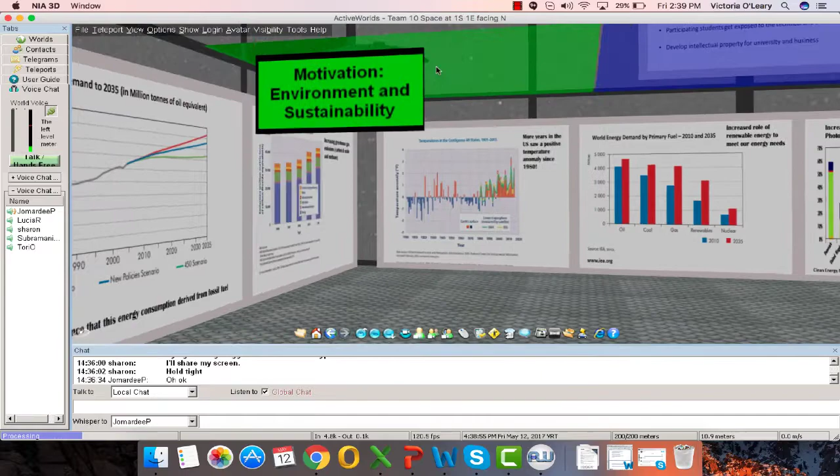Awesome. And so to get a little intro overview, our OPSPARC technology spinoff is basically based on the electronic speckle pattern interferometer that was used to test the non-optical surface of the James Webb Telescope, technically the backplane of the telescope. We're using this technology to find deformations in the hydrogen fuel cells before certain hazards come into play, like hydrogen embrittlement, leakage, and possible corrosion.

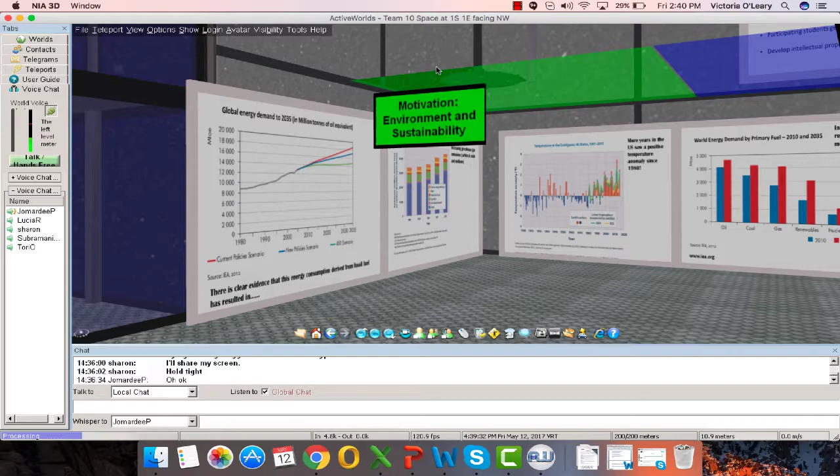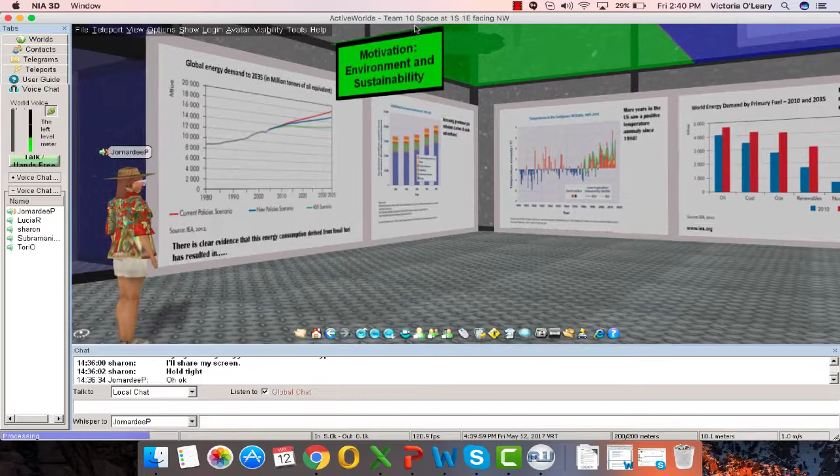And if you move to the left, follow the signs that say this way, we're looking at the motivation, environment, and sustainability. These graphs demonstrate global warming and climate change. The third graph talks about the annual average temperature in 48 states and high demand for energy.

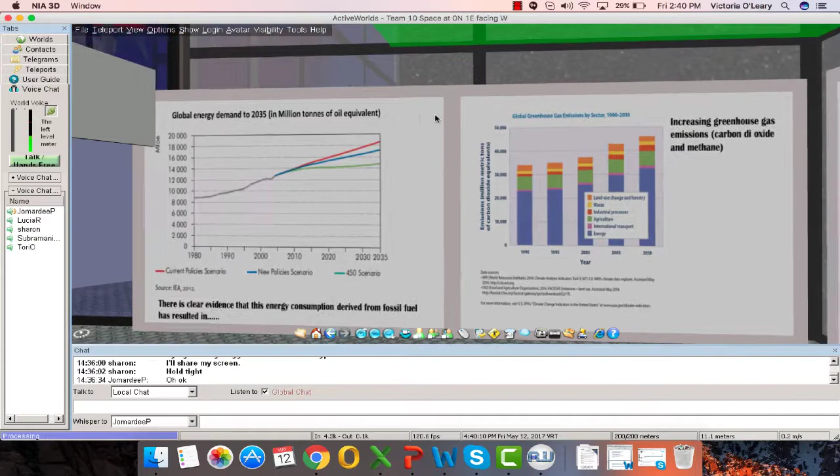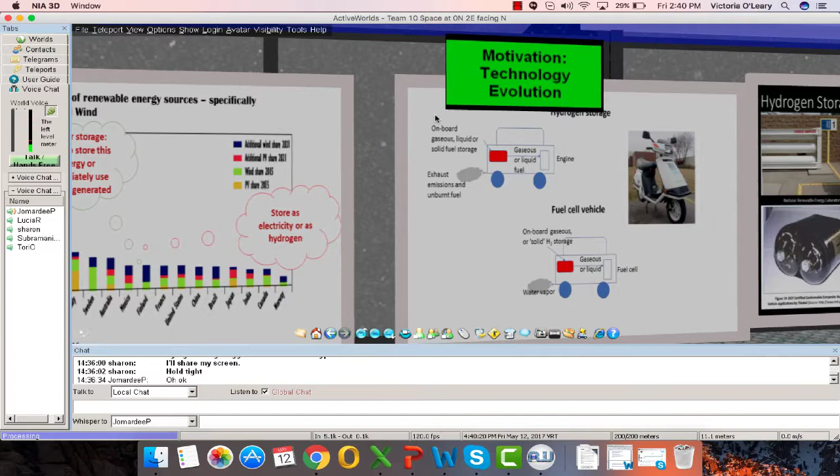If we continue to the right, going to motivation, technology, evolution, I'm going to hand it off to Matt to talk more about that. Hello, everybody. So yeah, I'll talk a little bit about hydrogen and hydrogen storage. So we focused on the automotive industry as a case study for hydrogen storage and fuel cells. But again, this type of speckle interferometry can be used for basically any storage tank, for example, methane or oxygen.

So we wanted to look into hydrogen specifically due to the challenge of hydrogen embrittlement for certain tanks like high-strength steels, titanium alloys, and aluminum alloys. But there's also opportunities for improvement in automobile applications for storing enough hydrogen to achieve greater than 300-mile range within the constraints of weight, volume, durability, efficiency, and cost. And cost is sort of the impediment right now.

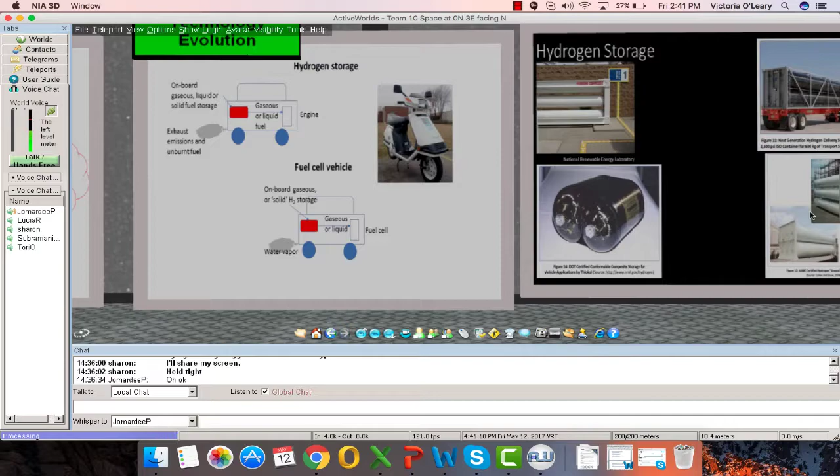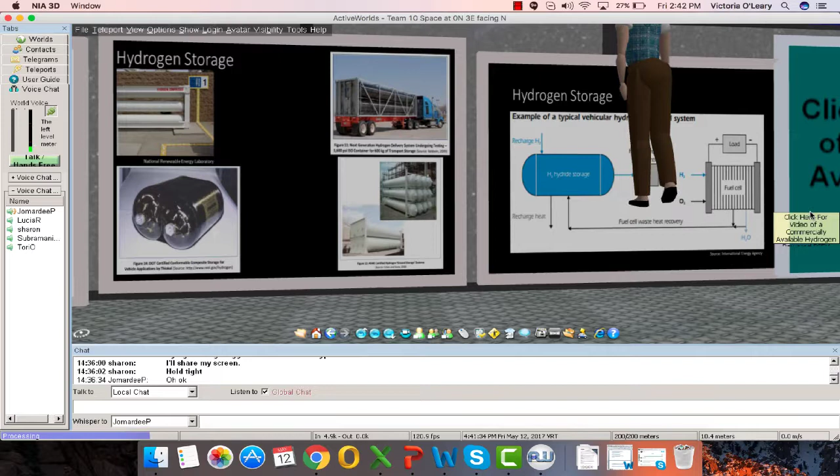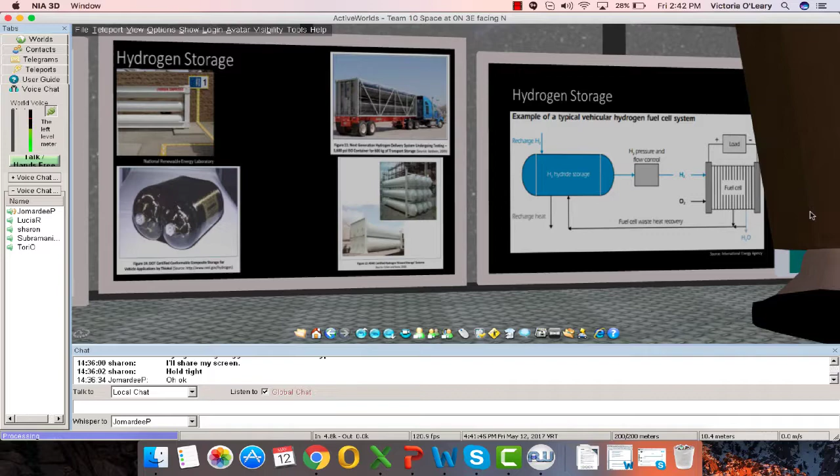So current tanks in this regime are compressed hydrogen carbon fiber composites, and typically you'll see 350 and 700 bar. Again, costs right now are too high, so that's a big worry. We also have a worry with leaks. As you guys know, hydrogen is extremely small. It can leak through tiny pores in welded seams. So one idea for this might be hydrogen detection tape, or the IntelliPigment tape. This is just a side idea, but it has a proven track record with space shuttle launches.

And hydrogen is a colorless, odorless gas and highly combustible. So it's critically important that we have measures in place to ensure safety. Hydrogen burns in air at a wide range of concentrations from 4 to 75% by volume, and it's also hard to see these flames. We think speckle interferometry could be a viable test technique to detect early signs of material defects in storage tanks that lead to critical failures. This would help facilitate proper standards for hydrogen storage and ensure safety and public acceptance in the broader consumer market for hydrogen fuel cell vehicles.

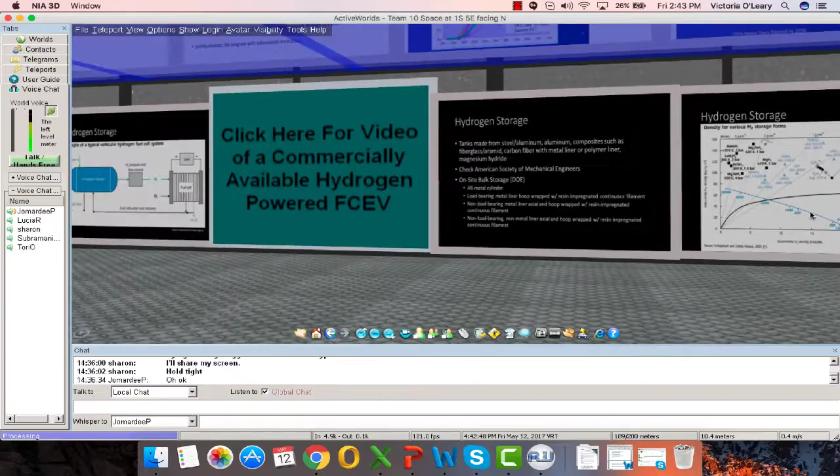Currently, we have only 3 vehicles on the market, one from Toyota, one from Hyundai, one from Honda. And the majority of the market share for hydrogen refueling is in California, with 20 out of the 23 refueling stations being there. And also some information about the U.S. hydrogen supply: 95% comes from the natural gas reformation process.

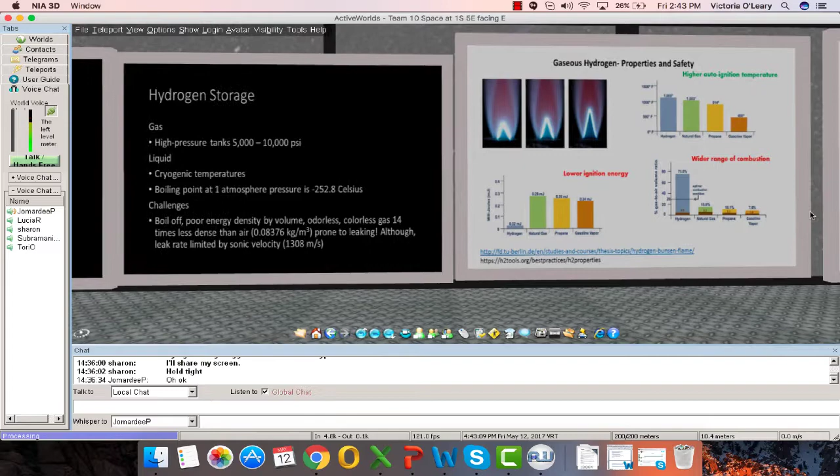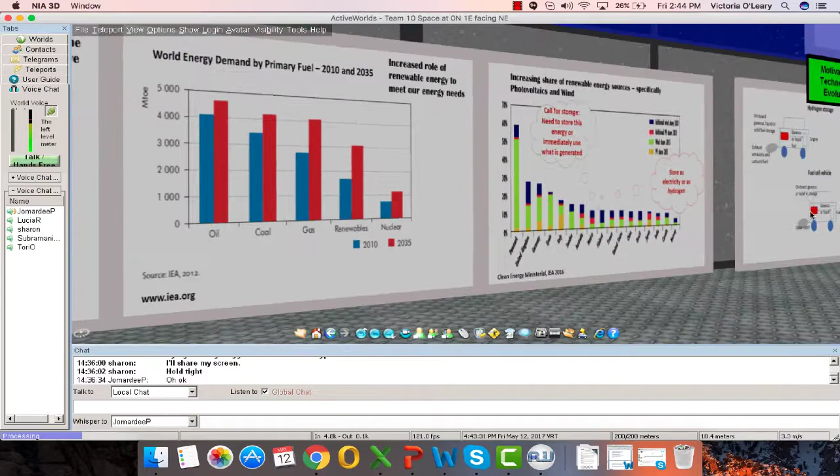So the major concern as far as hydrogen storage goes is the manufacturing process from different automotive companies and the ease of access to those tanks, so that we can run the interferometry tests on them in as automated a way as possible to reduce cost. So yeah, with that, I will turn it over to Alan. We will be moving to the right here. Just follow the signs: existing non-destructive testing technologies, ultrasonic detection.

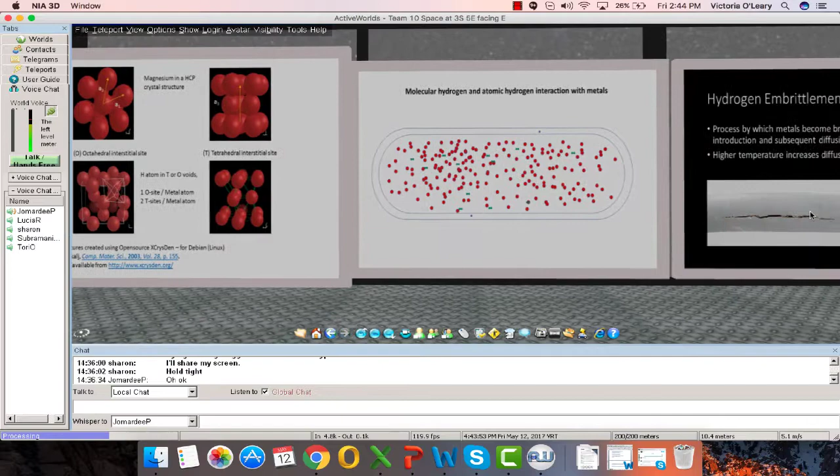Go ahead, Alan. Okay, so a small overview of non-destructive testing, or NDT. Those are methods that allow us to test a specific sample without altering it in such a way that it's rendered not useful anymore. One of the ones that we looked at was ultrasonic testing. Ultrasonic testing is basically using high-frequency sound waves to inspect the features of an object.

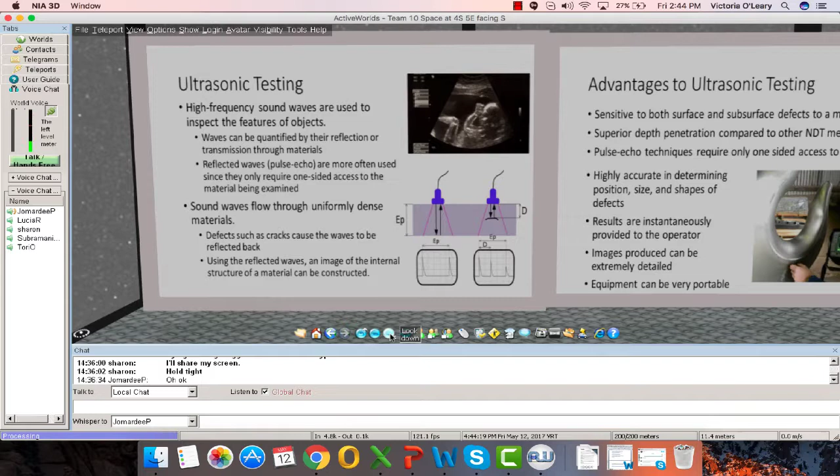You're sending sound waves into this object, and they'll come back to you either as reflections or transmissions if they make it all the way through the material. And by using these waves that either are reflected back to you or transmitted straight through the material, you can construct an image of the inner workings of the material.

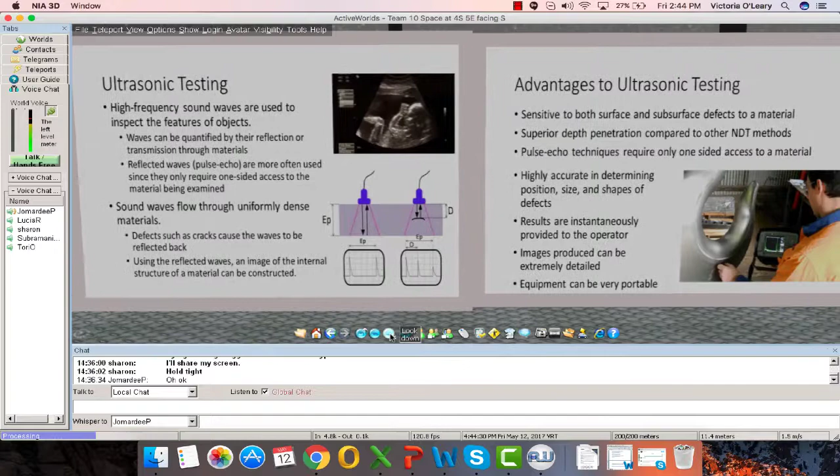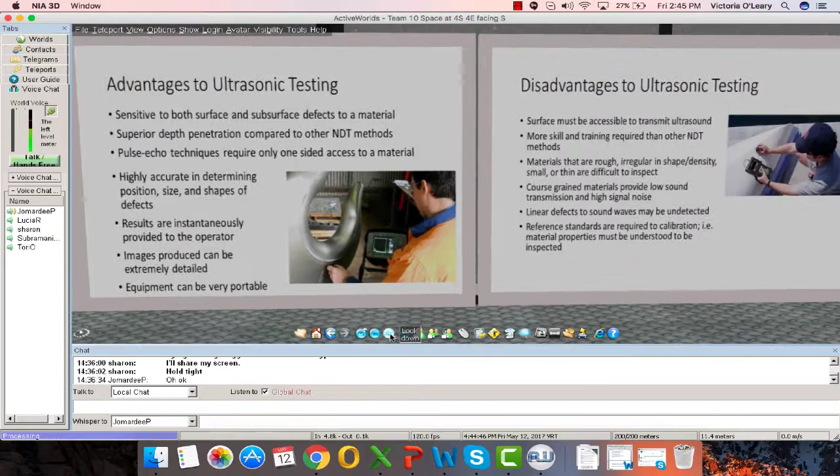Sound waves will normally flow through uniformly dense materials, but when they encounter something like a defect, like a crack, they'll bounce back. And using some computational analysis, you can quantify these reflected waves to construct an image, kind of like what you're using with the ultrasound for pregnancy tests.

So some of the advantages of ultrasonic testing is that it's sensitive to both surface and subsurface defects, depending on the frequency of sound that you're using to penetrate the material. It's got superior depth penetration compared to other NDT methods, and the pulse echo method in particular requires you to only access one side of the material. You don't need all-around access.

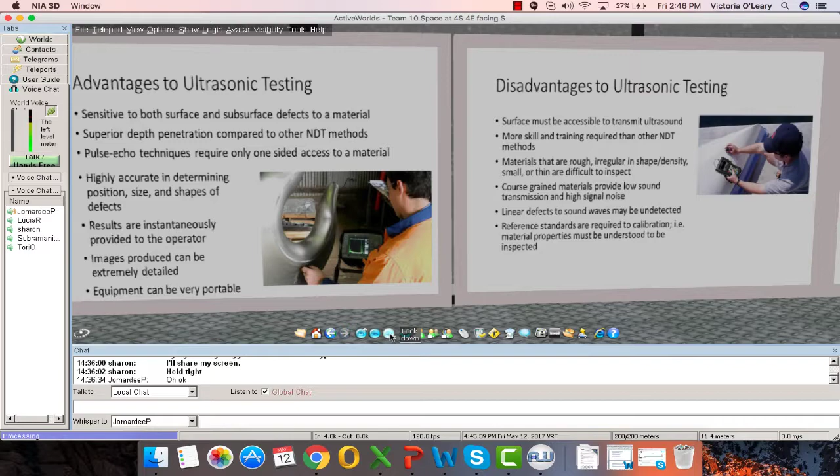Ultrasonic testing is highly accurate in determining the position, size, and shapes of specific defects, and the results are given instantaneously to the operator of the machine. The images can be extremely detailed, and the equipment can be extremely portable, as seen in the image over there, where you can carry it around with you on site.

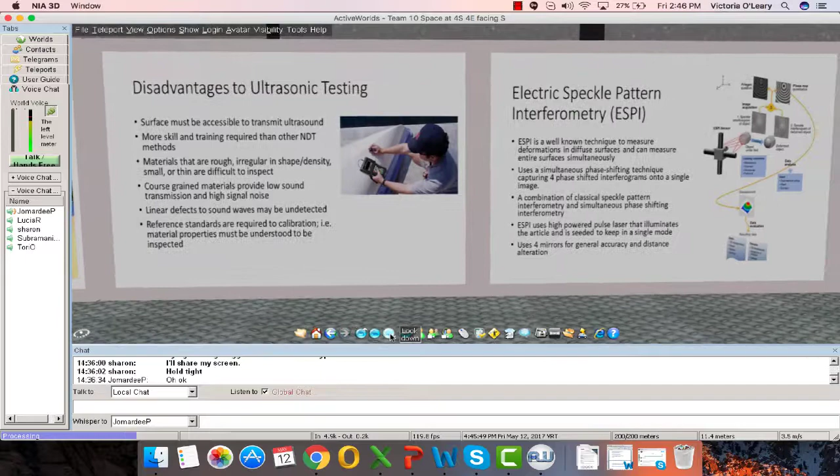However, all of this comes with some disadvantages. So some of those are the surface needs to actually be accessible for you to inspect it. You have to be able to touch and sort of manipulate it. There's a lot of skill and training required to learn how to use this NDT method, and materials that are rough or irregular in shape and density or small are very difficult to inspect with ultrasonic testing.

Coarse-grained materials in particular are very difficult to inspect because of the low sound transmission and high signal noise, so they don't give you a very detailed image at all. Linear defects, or cracks that are right in line with where you're inspecting the material, are almost invisible because they don't produce any reflected waves.

And reference standards require calibration: you need to have tested the material beforehand and need to understand its properties to be inspected. So composite materials may prove to have some difficulties in inspection. And I'm going to bounce it over to Derek to talk about ESPI.

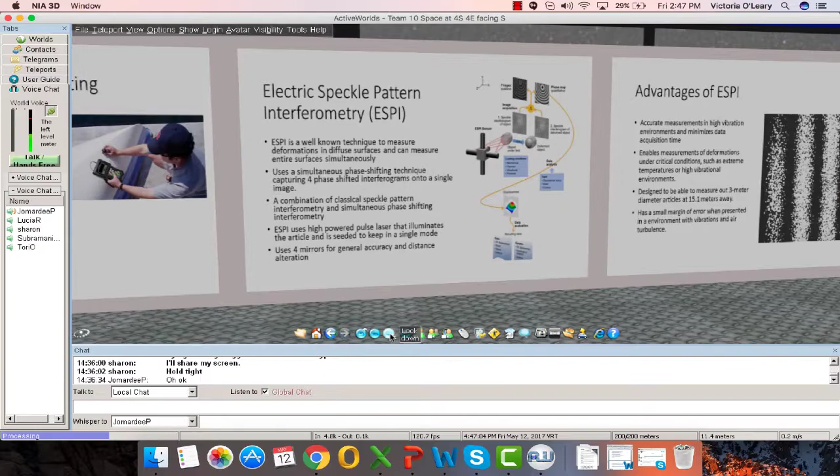Hi, so ESPI, otherwise known as electronic speckle pattern interferometry, is an optical technique which enables interferometric measurements of surface displacements. ESPI uses an expanded laser to illuminate the surface of an object, and the surface is then captured and recorded with a CCD camera, which generates an interference pattern, otherwise known as speckles.

This technique uses phase shifting to find fringe patterns. This reveals displacement of the surface as contour lines of deformation. And phase shifting is basically when you take images of an object or surface and layer them over each other.

So some advantages of this technique: it's non-contact, so you could just set it up and leave it as it is, unless you want to do some fine tuning. It can be used on almost any surface or material, so it's very adaptable to whatever you want to use it on. It's very precise and accurate with its results, and it's really easy to see the area of high stress. This technique can also follow displacements in time because it uses multiple sequences of measurements. It is very effective as well.

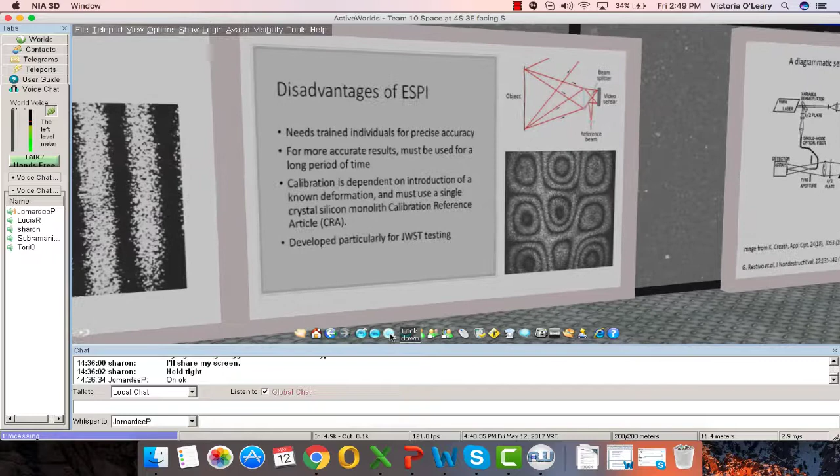So with this technique, there are also some disadvantages. For more precise and accurate results, you're going to have the laser and camera used prolonged on the surface or object. The results really depend on the performance of the camera, so if something's wrong with the camera, the results can be inaccurate. And spurious movements, like a sudden change in movement or sudden turbulence, can cause inaccurate results. And I'll pass it on to Lucia.

Sweet. Before doing that, you can just walk towards the sun right here to the warp, and it'll transport you to the top. So I'll turn it to Lucia. We're going to make our way to the left as Lucia talks.

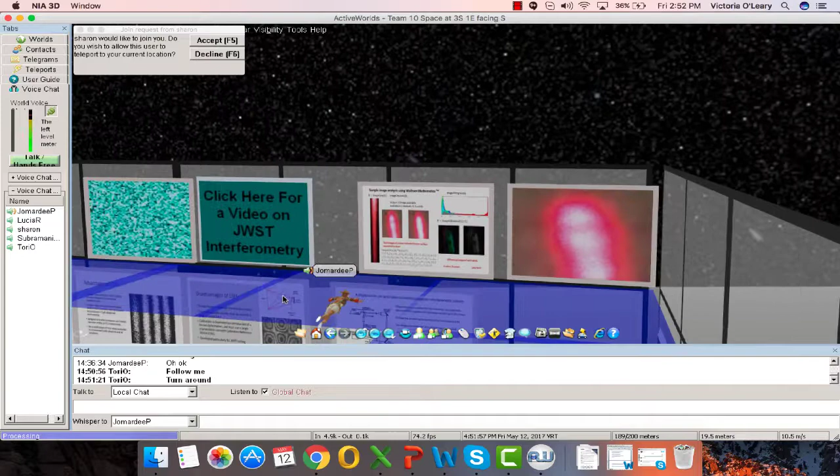Go ahead. And so these images here are showing the same laser, but the images were taken at different times. If you zoom in on those pictures down at the right corner, you can see the different pixelations between the two and how that is shown with the change in time.

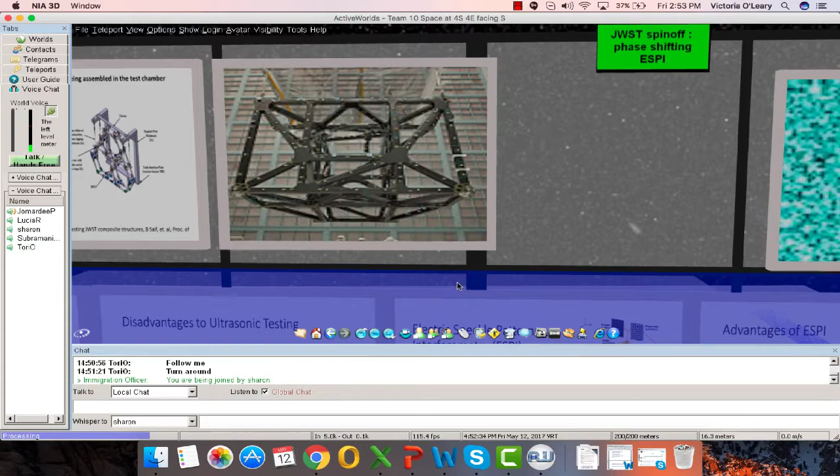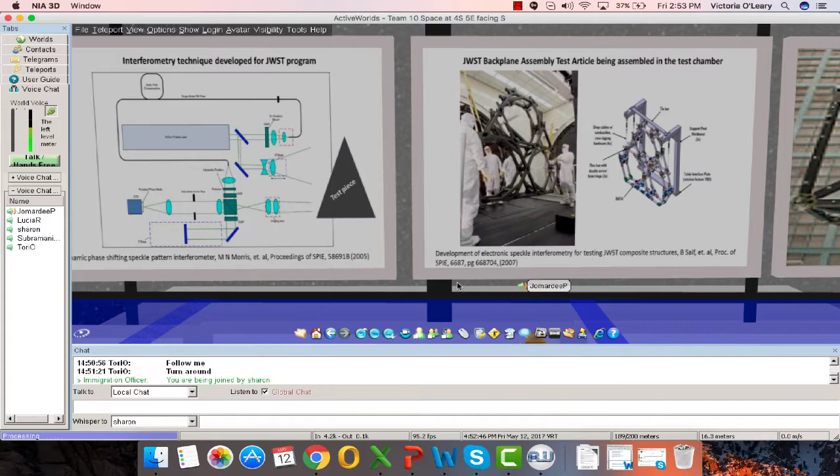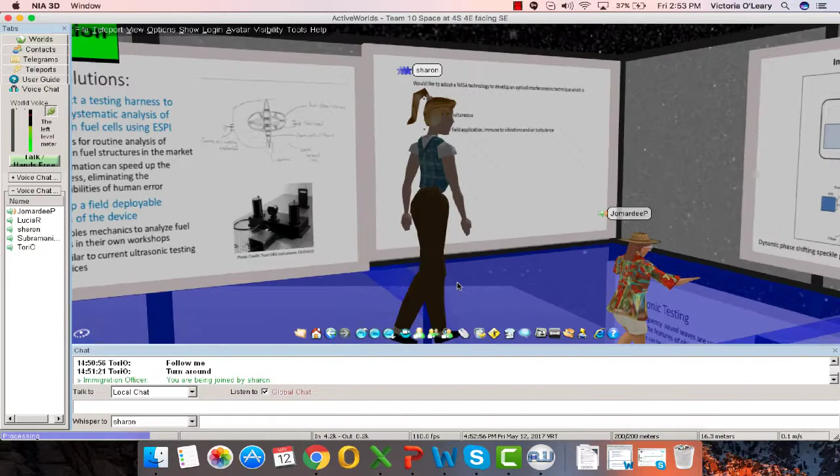And as we keep moving to the left, we start to see the information we have on the James Webb Telescope and how we used it in our project. If we keep moving, we have the backplane and an image of how it was assembled. And the next image shows a diagram of how the phase shifting speckle pattern works.

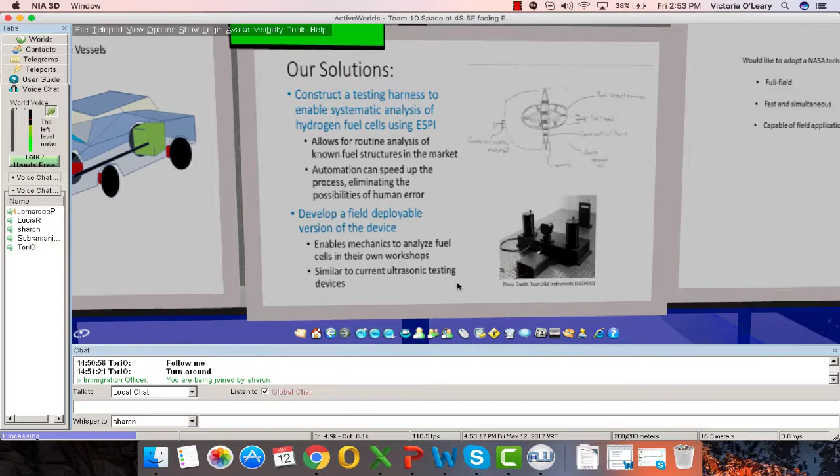And keep moving down. And so now we're going to focus on this image of the car and how this uses speckle interferometry to test the fuel cell storage of hydrogen to quickly identify whether there is a leakage. So we intend to have a fuel tank to be in the trunk of the car for easy accessibility.

Oh sweet, you're all here.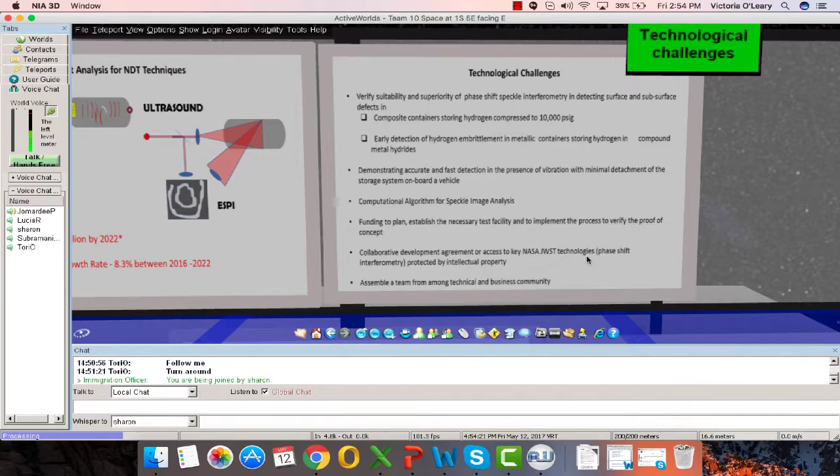We're going through the technological challenges. Thank you, Lucia, for that. So some of our technical challenges here is the funding, like from who are we going to get funding from. There's also various ways for ESPI to be set up, as you can see, like which is more efficient and what's more accurate in ways of setting it up in order to detect more accurate deformation when testing the hydrogen storage.

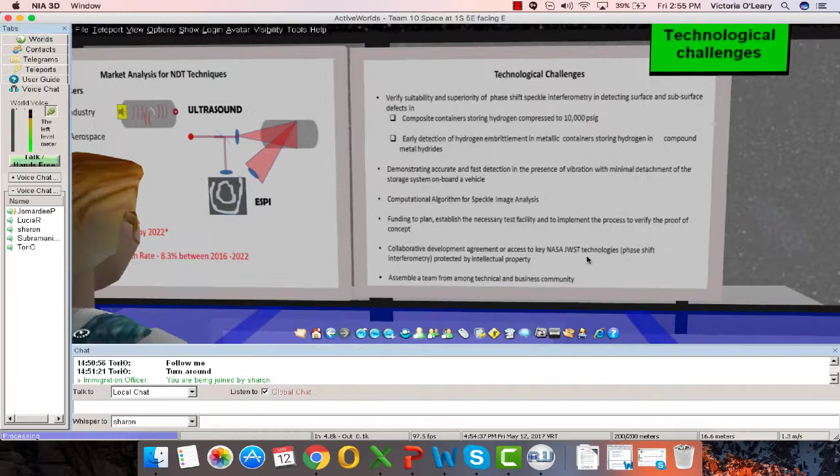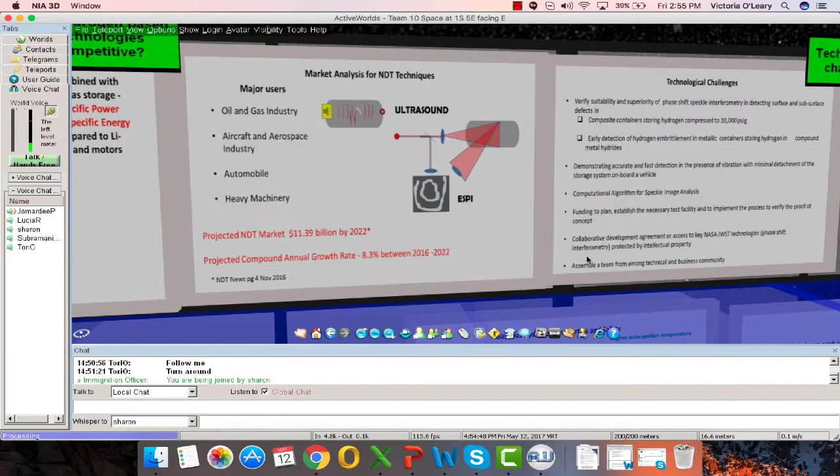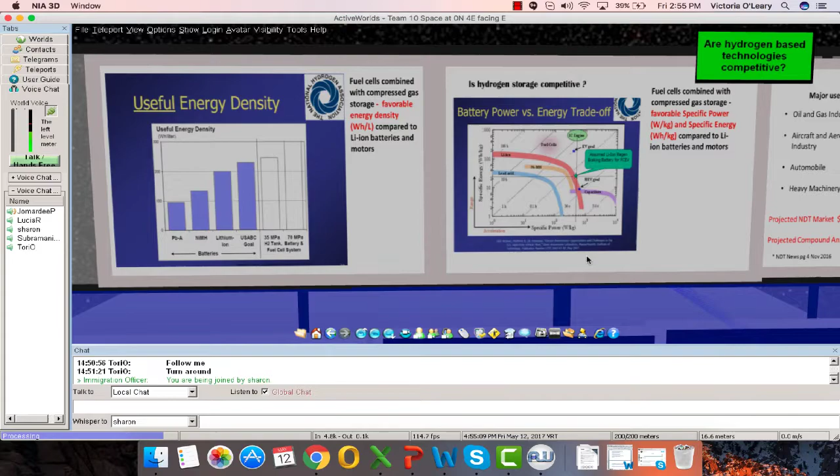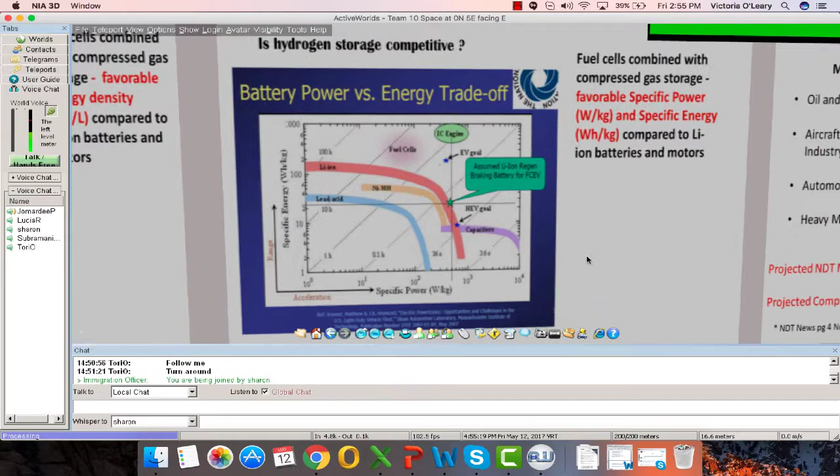Also, that leads to assembling a team, like who has the knowledge of understanding ESPI. Do we either train our engineers or grab new engineers? And that goes to, keep going to the left. This is a market analysis for NDT techniques. I just want to overview saying that mainly we want to increase the major use of automobile, but our targeted audience are the ones who are in the major users here too. And in red, the projected NDT market has positive growth in 2022, as you can tell.

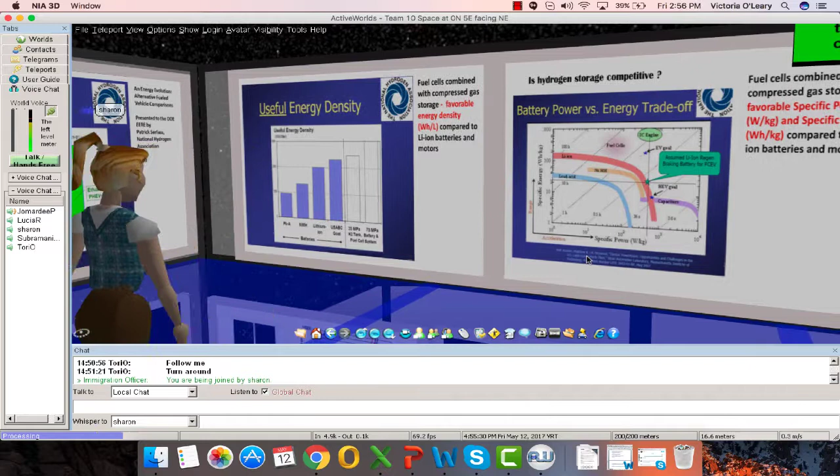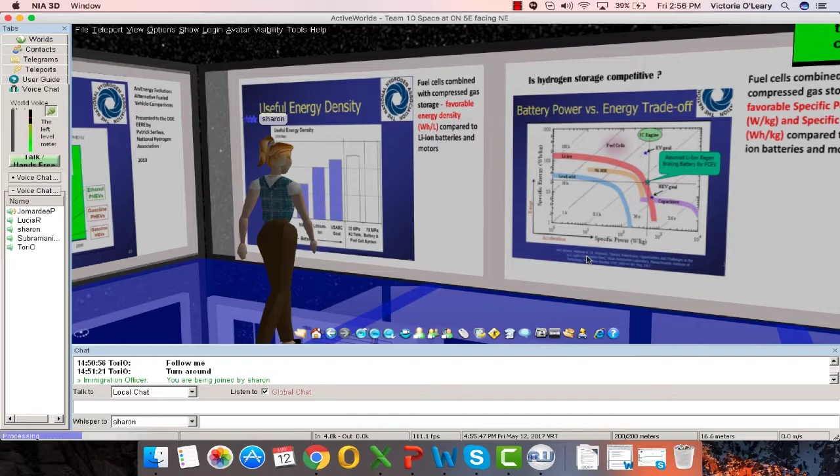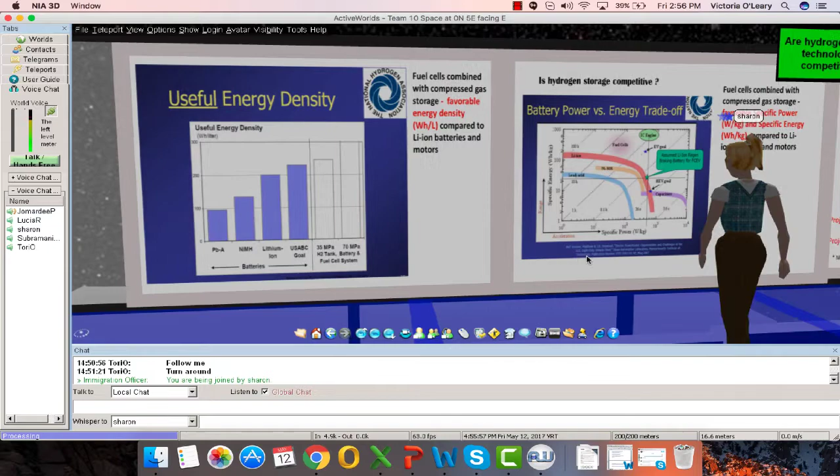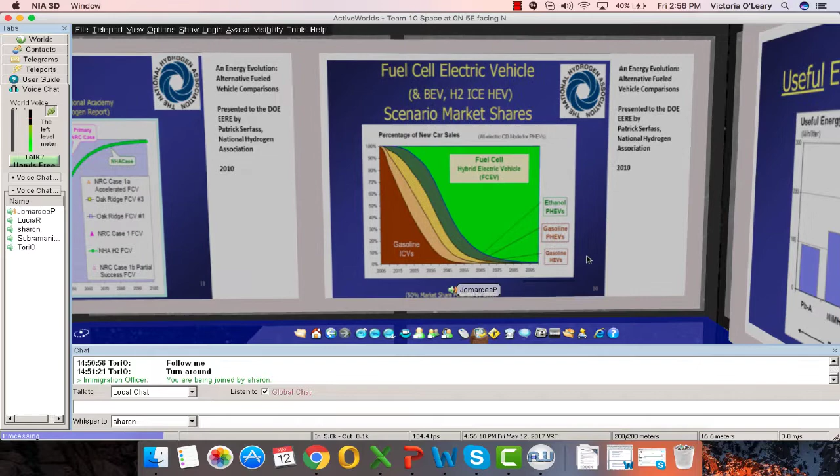And then if you continue more, the other couple of graphs, you can see the fuel cell electric vehicles. You can see the fuel cells here have high demands in the future versus gasoline. And you can see that huge decrease in slope. The x-axis is the years, whereas the y-axis is the percentage of new car sales.

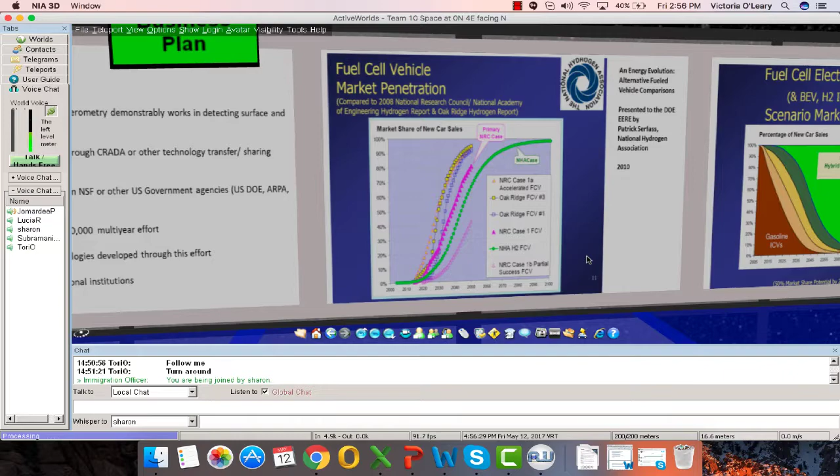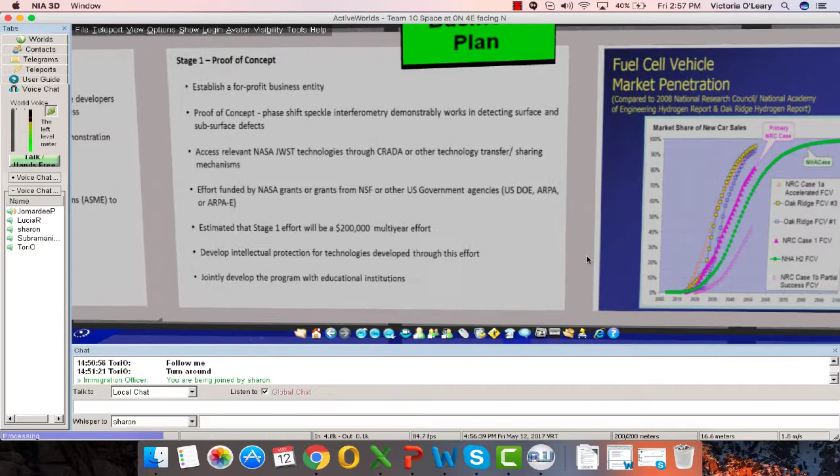And going off to our business plan. So we're trying to map the future and hopefully estimate a stage of about 200,000 for all the equipment for the electronic speckle interferometer, also the scientists and engineers within that 2 years. We're also seeking funding through government grants, NSF.

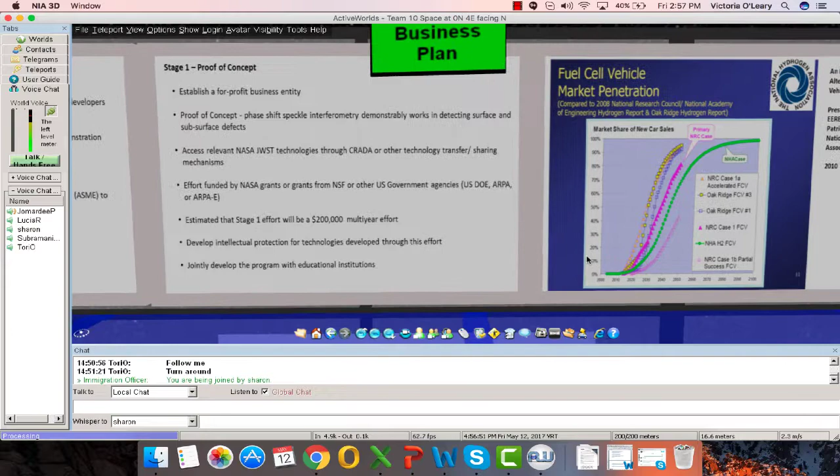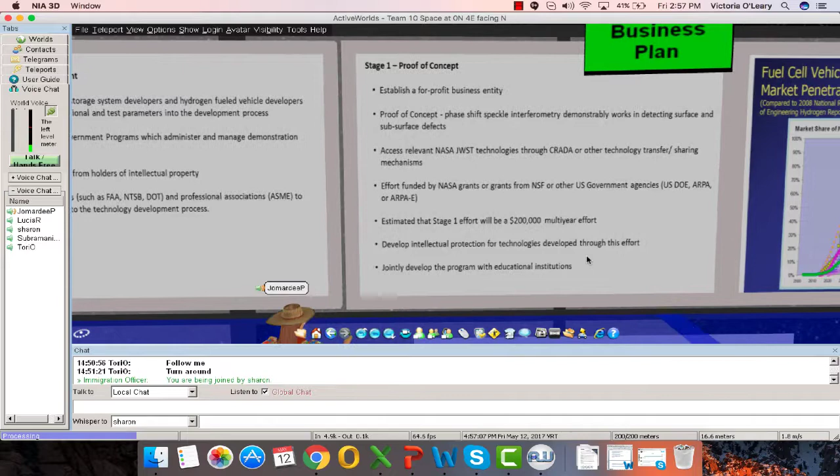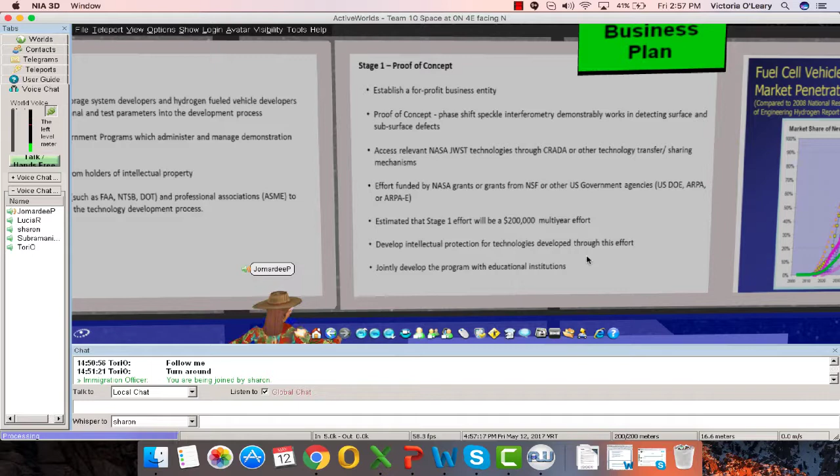Our targeted audience is huge industries, industrial manufacturing companies. Toyota has huge demands for more efficient vehicles, so Toyota would be a great target. Also, if we want to take it out of the U.S., other rocket industries like ESA. And on top of that, we're going on to the SWOT analysis.

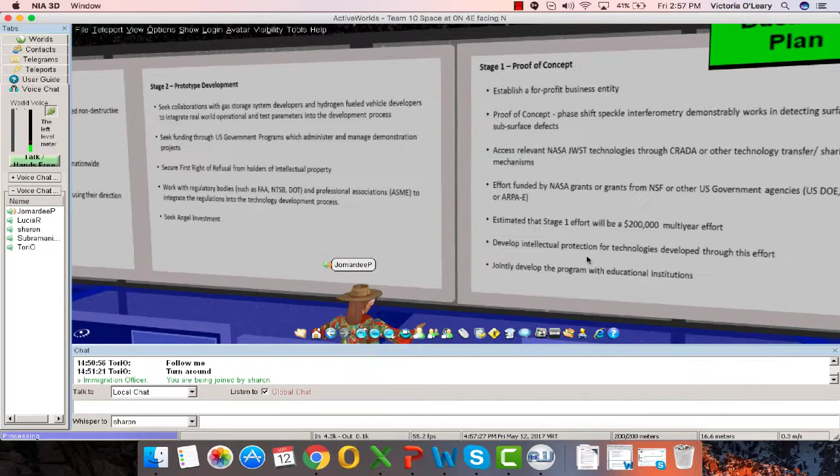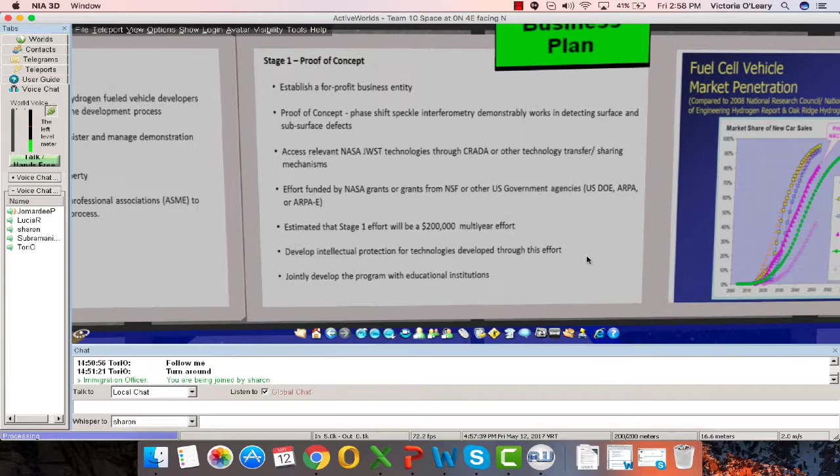For the strength of this technology, it has a huge step of efficiency. It's really automation versus human intuition. So it's basically decreasing labor costs and on top of that, increasing safety of the storage. So it'll catch early signs of potential hazards, etc. It also decreases the time of inspection.

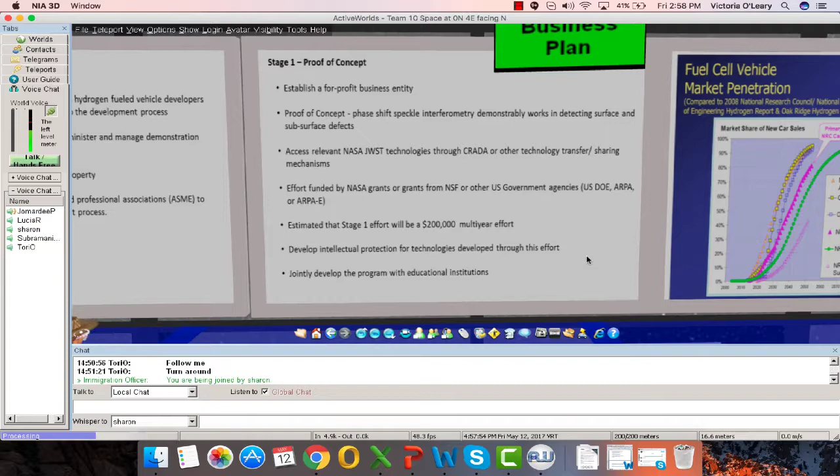Some weaknesses it contains... on top of that, there's more strengths like quick visual imaging detectors. Like we said earlier, it's non-contact, so you don't have to have a physical body there to test the deformation of this hydrogen storage. And like I said, there's multiple ways of constructing ESPI.

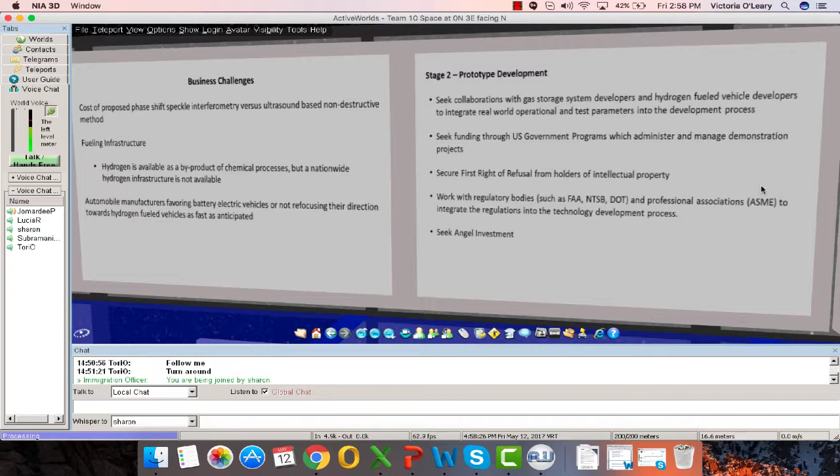Weaknesses, though. We're not sure if vibrations from outside sources can miss smaller deformation patterns, which on top of that misses stress corrosion cracking on the storage. And a huge weakness we do have is the removal of the storage tanks. So depending on the manufacturers, how are we going to remove the storage tank in order for the ESPI to detect any of the deformation?

Opportunities: it's an increase of industry in the near future, it extends the life of fuel cells, and it's not only just testing hydrogen storage, but there's also other elements like nitrogen storage tanks. And we also want opportunities like limiting human errors.

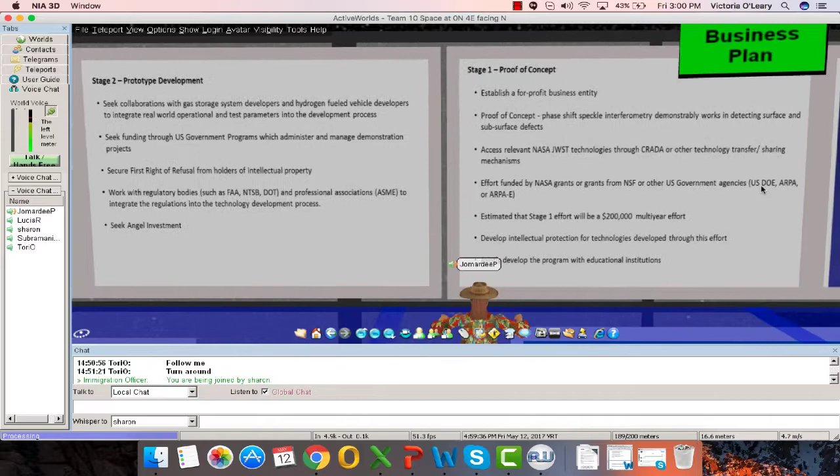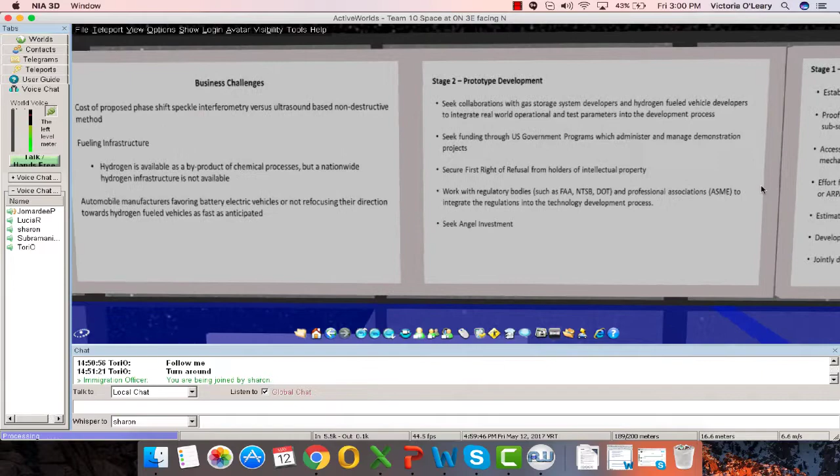Threats: the market cost of technology, it's pretty high. And on top of that, it's the inability to retain current engineers. So basically, using that money to either train our engineers or educate them, and that new knowledge comes with new problems, whether it's training our engineers, money to train them, educating them, and the amount of time to educate them. And then I'm going to give it off to Alan for our solution.

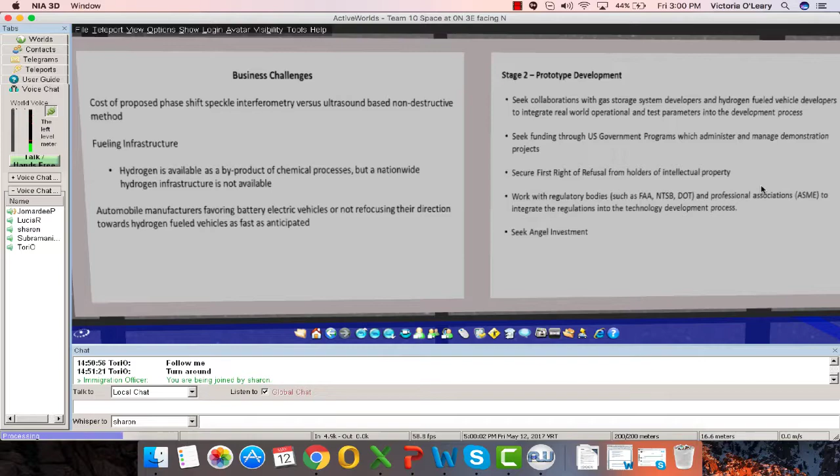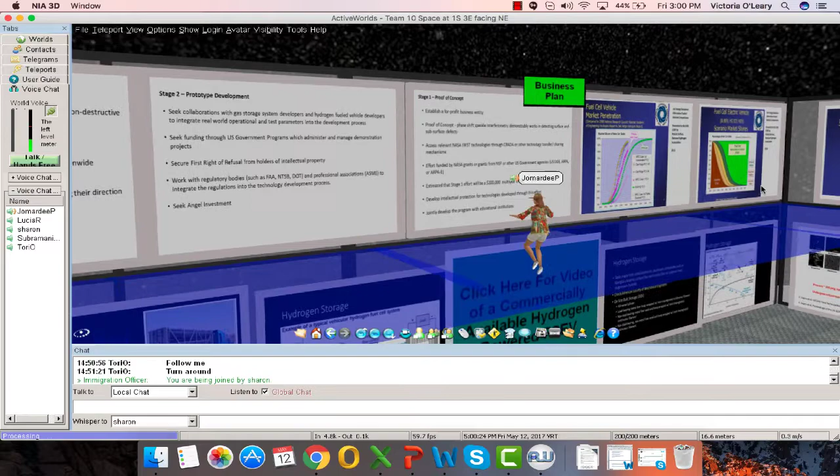Okay, so our initial solution is basically to construct a sort of testing harness to inspect these hydrogen fuel cells. This would allow a more routine process for inspecting them so that it's not too dependent on the shape or the size of the fuel cell. So this gives manufacturers a bit of leeway in how they want to design their fuel cells.

We still have the problem of how to get those out of the car, but using automation, we... oh, sorry. Continue. Okay. Using automation, we can eliminate a lot of the human error that comes from manually setting up these cameras and rotating them around the structure.

Afterwards, we're going to try to work on a field deployable version where it's more handheld, similar to the ultrasonic testing devices. This way, we could allow mechanics in normal auto mechanic shops to inspect these hydrogen fuel cells, and this would allow for hydrogen fuel powered cars to be more prevalent in industry if you can now take it to your everyday workshop to get it fixed up.

Sweet. Thank you. Yeah, sorry, our solution wandered off somewhere in there, but you can hear it is fine. This is where we're going to end it.

So broad impact, I want to just say the use of ESPI will help pave the way to a more advanced and efficient type of technology for the future.